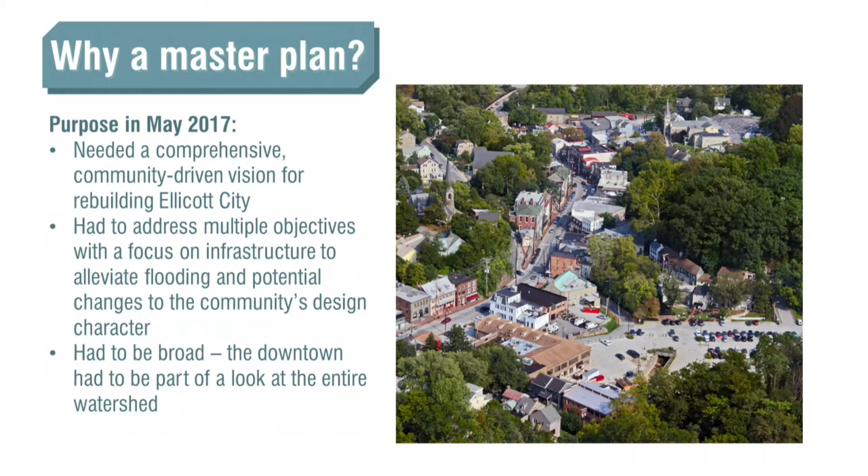Ellicott City is a complex location. It's a historic community, a gem when it comes to architectural character. It's a vital downtown, and we wanted to make sure that the master plan reflected infrastructure changes to alleviate flooding, but we knew those may affect the urban design character of Ellicott City. So that was an important consideration. And it had to be broad because it's not just about downtown Ellicott City. This plan is about the entire watershed, which makes it very challenging.

So why this comprehensive approach? Again, Ellicott City is an important tourism resource. It's a designated sustainable community. It's a Maryland Main Street, and it has historic features qualifying it both as a local county district as well as a National Register district.

So as a result of the 2016 flood, the Department of Planning and Zoning, together with other county departments, did a nationwide search to find a consultant team to help us develop this master plan. We wanted somebody with national experience, we wanted somebody with flood experience, and we wanted somebody who was good at community outreach. So we ended up hiring a facilitator.

Many of you probably participated in those meetings, with somebody who had post-Katrina and post-9/11 experience in New York City. We were lucky because we were able to hire a local firm that had national experience with these types of planning efforts, with specialties in urban design, engineering, historic preservation, development economics, environmental planning, and again, the importance of community outreach. And they've been involved in other flood-impacted communities. So that was a real great thing.

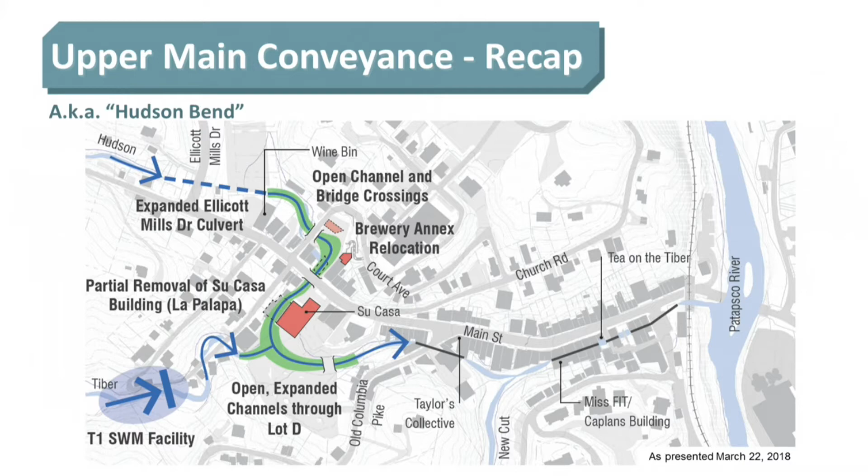At that point, we also identified buildings that needed to be demolished in order to accommodate this open stream channel. It involved relocation of the brewery annex, partial removal of the La Palapa, and with that, the open stream channel would create a great public space. With that, I'm going to turn it over to Mark, who will talk a little bit about the H&H model.

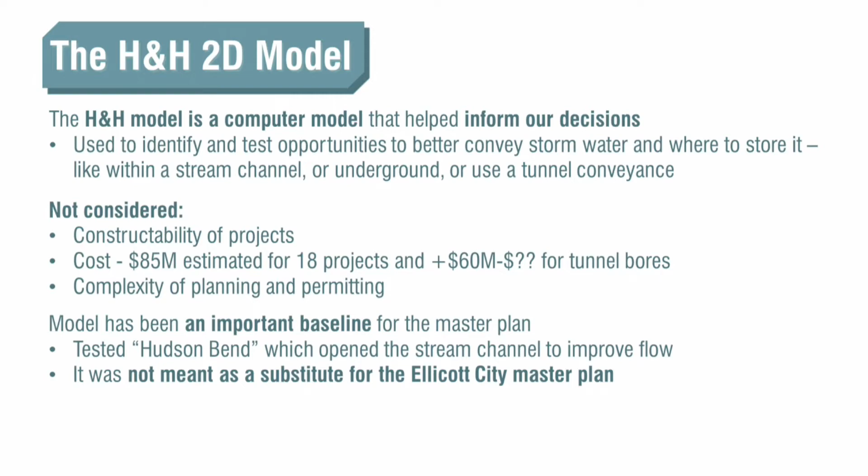One of the projects tested was something Val just mentioned, the Hudson Branch project. There were many other iterations of improvements that the master planning team looked at that we passed through the model. The model and the original projects were never meant to be a substitute for the Ellicott City Master Plan — it was all supposed to run through the Master Planning team and be tested through the model.

So one of the questions is, we had these 18 projects for $85 million, but we had set aside the tunnel projects. We felt at the time, for good reason, given the cost of the projects, they were so limited in nature of where they actually function. If we had done the 18 projects, lots of areas within the Tiber-Hudson watershed would see significant reductions in water levels, but the lower end of Main Street, not so much.

The tunnels were important for that, but we were trying to figure out other ways, because the tunnels were individual discrete projects of $30 to $40 to $50 million each, and they weren't going to be accomplished in a short 5-year period, certainly not in the immediacy of how much could be done in 1 year. But we explored two tunnels, a south tunnel and a north tunnel, and I'll talk about the south tunnel first.

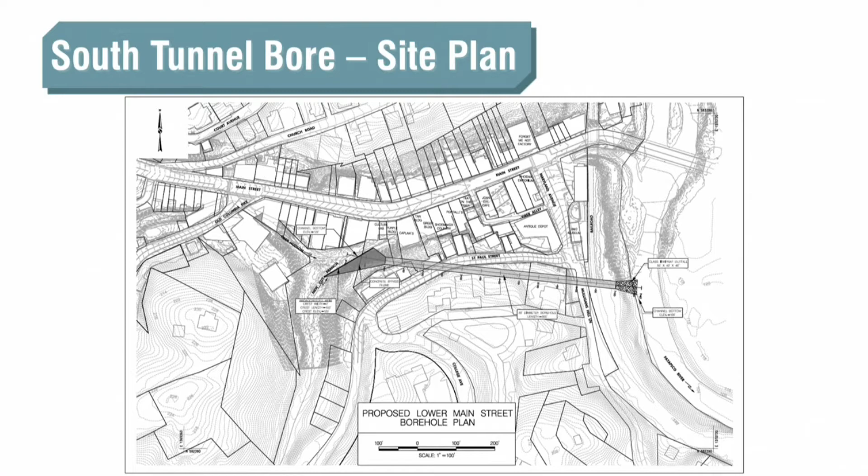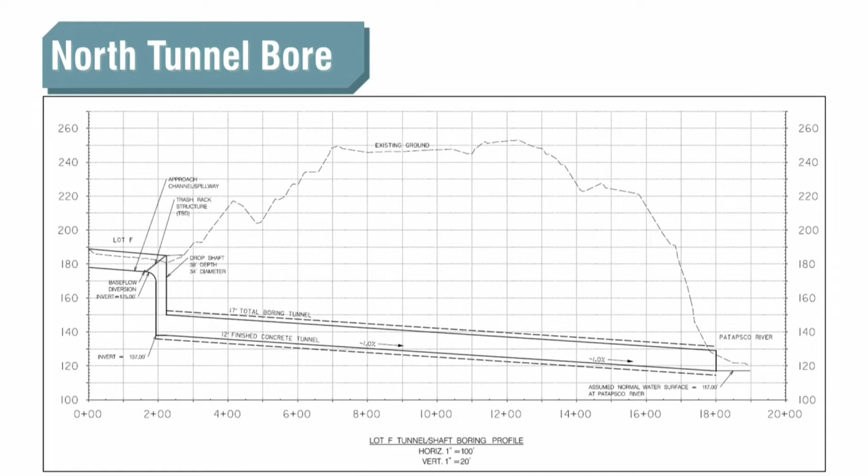This elevation, we never got as far as putting tailwater on it. We just assumed a low tailwater that's not a storm. And then this is the profile of the ground. It doesn't have landmarks on it, but it actually goes under Court Avenue—no, Church—maybe parts of Emory, and then comes out somewhere underneath the railroad tracks again and into the Patapsco River.

So this one turned out to be at about $30-some thousand. This turned out to be about $30 to $50 million to construct, and we felt that it would only go north from there.

This elevation from about here to here is almost 100 feet, so it's very deep in the ground. Of course, Church Street is a hill, and the elevations really shoot up, but we're very low below the ground.

Just from the fact that we'd be going under a lot of historic structures and residential structures, there would be a lot of vibration. There are a lot of constructability issues in terms of vibration, safety, things like that, and cost for one project, which was at least half to maybe two-thirds of all the other projects.

We said, well, let's set that aside. None of the tunnel projects were ever forgotten, except I truly believe we will not go for a south tunnel. I don't think that that's feasible. But anyway, we just set it aside.

Certainly with the mandate to try to do as much as you can in the 1-year time frame, and how much more in the 5-year time frame, this project was not considered to be something that could be done in the 5-year period. I don't know exactly how long it would take to go through planning, design, permitting, and construction, but it's not in the 5-year period.

Okay, so the tunnels themselves aren't the silver bullet, and that's the reason why they were set off to the side. The next slide I want to show you is from Washington, D.C. This is D.C. Water's project called the Clean Rivers Project. Regardless of the reason why they're building it, they're building 23-foot diameter tunnels in the city.

You can see, the reason why I think these pictures are so great is this is for the 23-foot tunnel. Our south tunnel is 23 feet, our north tunnel is 17, so it's basically the same scale.

Now, this is granted, 100 feet in the ground, and I'm really estimating that. I'm figuring that each one of these is about 10 feet, and the scaffolding is 1 story. So this is about 100 feet in the ground.

We would be—our tunnel at the deepest would be 100 feet, but we would probably start at 39 feet below the ground, probably a little bit more, probably 50 feet. And it's a huge concrete structure that needs to be built just to lower in the bore machinery.

And you can't really see it here, but this is a crane, the type of crane that's used to lower this kind of equipment down into the hole. And so from a constructability, feasibility standpoint, we need to be able to find all the room to put that equipment. And it's not that it can't be done, okay? But it just doesn't fit neatly into a very tight 5-year period where we get things done.

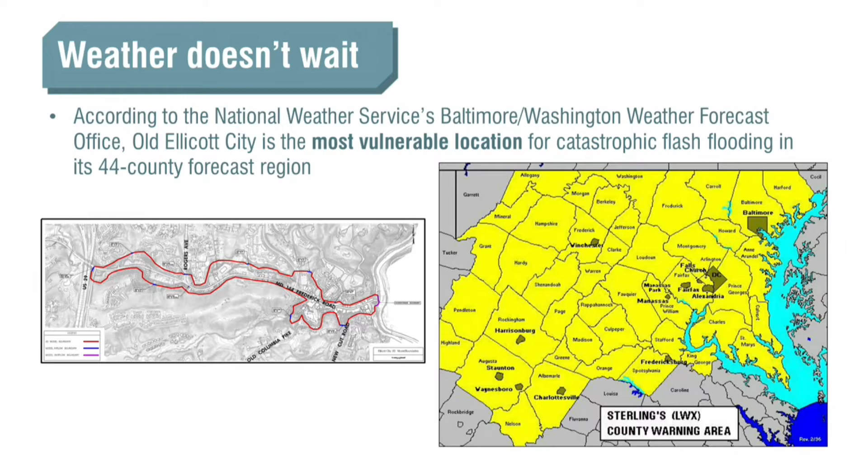And we're not alone. 2018 has not been a great year in terms of flooding. Numerous communities, the Midwest, the East Coast, have all been confronting this. And flash floods in an area like Ellicott City with shallow rock and steep grades create additional problems. You know, I was in Colorado when the flood hit the Big Thompson, and people were swept away in tents and sleeping bags. It happened in 1976, and again in September of 2013, when they got a similar deluge compared to the one that we got in Ellicott City just this past spring.

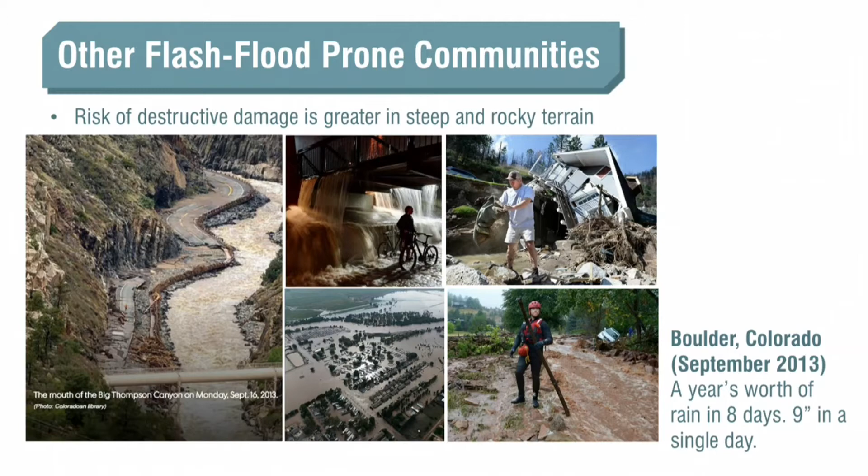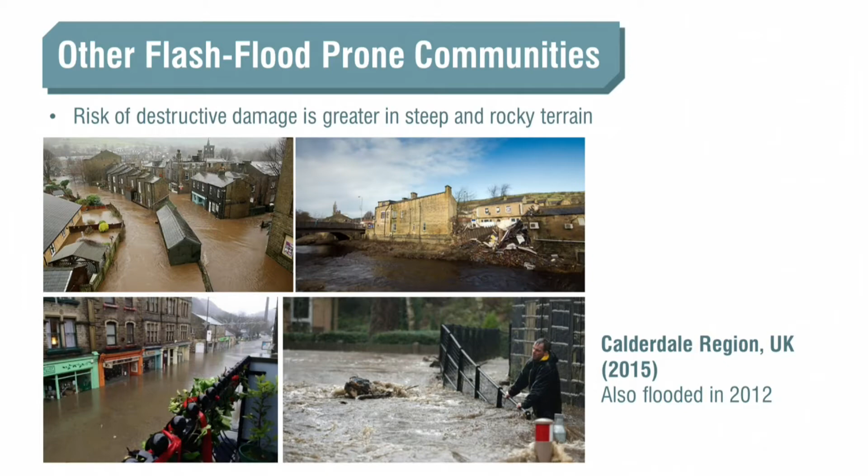Vermont has also experienced these kinds of issues. Our project team has been involved with some of the post-flood planning in the Northeast. And we've even looked to other countries, and you'll see some examples that our consultants will talk about in Calderdale in the UK.

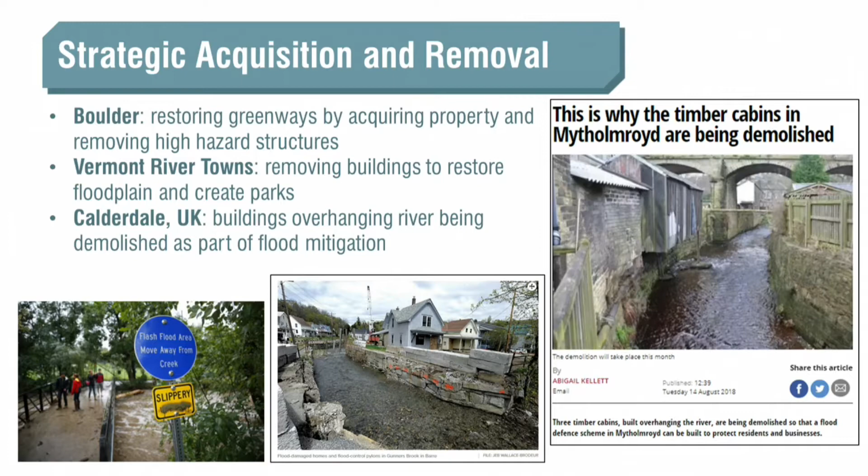The common element here is they're doing something about it. Boulder's restoring greenways, they're acquiring property, they're removing high-hazard structures. Vermont river towns are removing buildings to restore floodplain and to create parks. And in Calderdale, they're removing buildings that overhang the river. They're being demolished as part of flood mitigation.

So time is of the essence. Our goal here is that the 5-year plan identify and begin implementing projects before the next thunderstorm or hurricane season in a way that would reduce flood depths and water velocities to a level that can be addressed by flood-proofing the buildings in lower downtown. The result of that goal was the near-term, or 5-year, plan. And it's the most effective way to approach these issues because it addresses protecting lives. It's urgent.

It addresses urgency because most of the projects can be addressed in a shorter period of time. Their feasibility and constructability has been looked at as part of engineering analyses, and we found that these projects are the most cost-effective from a perspective of, for every dollar spent, the benefit gain. And again, this allows projects to move forward within the first year.

The master plan interfaces with this near-term or 5-year plan. Typically in a master plan, you identify implementation strategies that are identified as near, mid, and long-term. Following the 2018 flood, the focus was on what can we do in the near term. So that became the focus of the approach that Mark had talked about here. So the 5-year plan is the near-term plan.

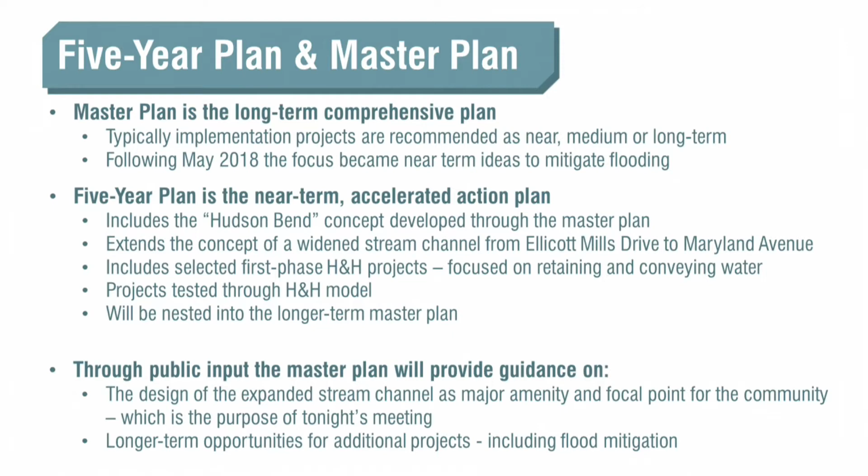And through public input like this, we hope to get guidance this evening on the design of the expanded stream channel that involves taking buildings out. We hope that it does in fact become a major amenity and focal point, and you'll see why we think that this is entirely possible. And as part of that process, the longer term and midterm projects, we're going to be looking at what other types of projects should we be evaluating for the Ellicott City watershed.

So the council voted on October 1st of this year to fund phase 1 of the 5-year plan. The county's recently submitted a permit application to widen the stream channel in lower downtown to the MDE and the Army Corps of Engineers. That does involve removing buildings. The application triggers what's called a Section 106 analysis, which looks at the historic structures and properties that are impacted, and the county's hired consultants to help us with that process.

And in addition, as we look to remove structures within the Ellicott City watershed, there's been a Historic Structures Review Committee established that will help advise the county on preserving key historic elements and buildings that somehow can be reused later on.

Council Bill 56/2018, which establishes a moratorium for development in the Ellicott City watershed, basically requires the Department of Planning and Zoning and the Department of Public Works to study flood mitigation both for the Tiber-Hudson watershed as well as the Plumtree watershed in Valley Mede. We've begun that process. We had a meeting with the Department of Planning and Zoning to look at a process that we'd be going through to look at how can the upper reaches of the watershed be addressed. Right now the focus has been primarily on Ellicott City. We are also going to be looking at the upper reaches of that watershed.

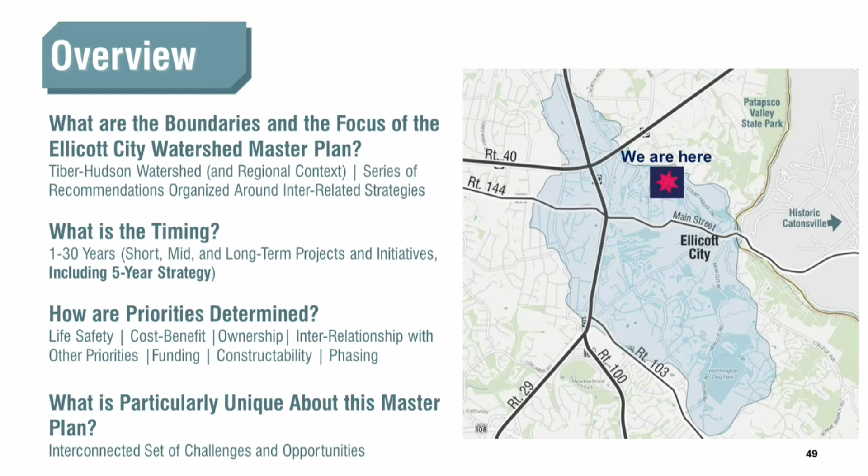And one of the things that's really unique about this master plan is so many things are interconnected. So you can't touch one thing without impacting so many others. So it really creates a real challenge here. But that's what also makes Ellicott City so unique, is all of these interrelated components.

So I'm going to hit, since it's been since March since we really hit on a lot of this, a very high-level summary of the master plan recommendations. One of the things we've heard is, all the focus is on Lower Main. What about the other recommendations? I'm not going to get into great detail, but just show you what's included in the master plan. Then our focus discussion will be Lower Main and the riverfront, and then some of these newer concepts that are grounded in the additional modeling and 5-year strategy.

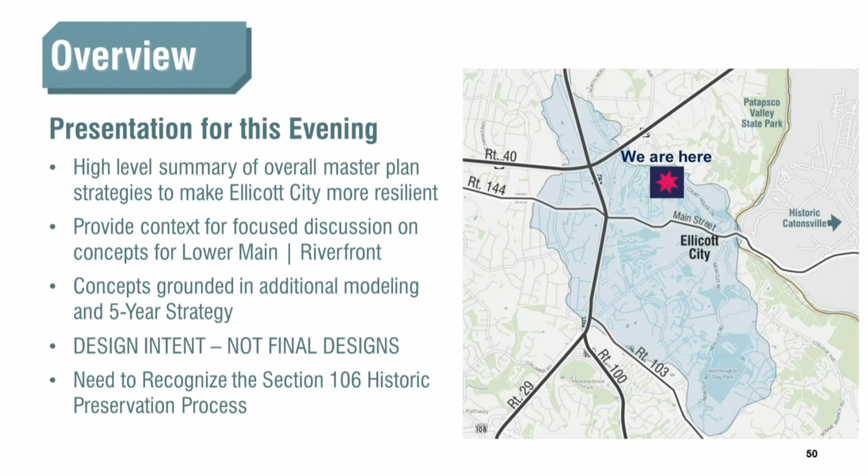I want to emphasize, you've seen some of the images online already. This is showing a design intent. There's still a lot of work. This is not final design. There's a lot of back and forth and additional modeling that has to be done. And then we also have to recognize the Section 106 process that will be underway as well.

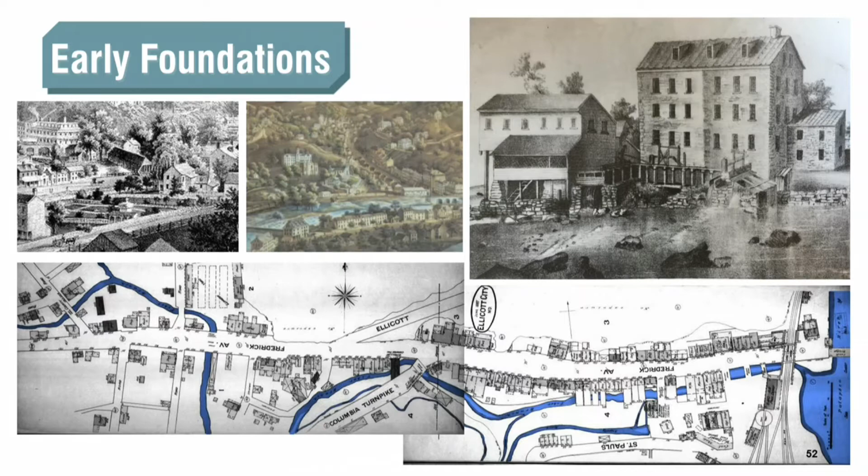So, one of the things that makes this watershed so challenging is the steep topography, the granite, the multiple tributaries leading into the Patapsco, and for obvious reasons, the town was settled right on top of the tributaries for harnessing that energy for mills. The bottom map, the historic maps, is a good illustration, especially in Lower Main, where some of these buildings are built right over the stream and the tributary channel, obviously for harnessing that power in the early days. That then creates all the wonderful intricacies and character of the community. It also creates and compounds a lot of the challenges.

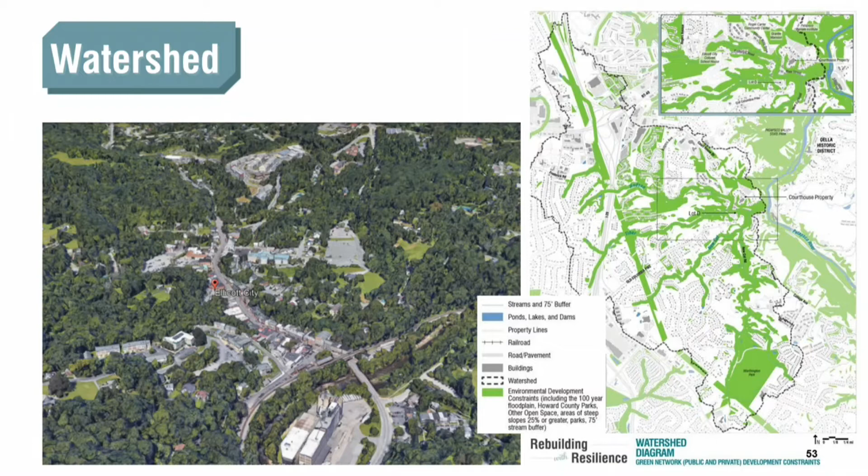As we expand out into the watershed, these tributaries offer wonderful green connections and fingers out into the watershed, and a lot of the recommendations in the master plan are to enhance these green fingers, both for physical connectivity and environmental connectivity.

The implementation of the master plan, it's partnerships, deliberate partnerships between the public and private sector, and all of the recommendations are interrelated. We can't touch one flood strategy without impacting parking, historic preservation, economic development, and so forth. And it's not going to be the county doing all of this. There's going to be individuals, organizations, businesses, nonprofits, and different agencies within the county.

Val already hit the vision statement, so I'm not going to go over that, and we also hit the core goals of the master plan, including the life safety that was added since the last flood. These core goals inform or apply to the 5 strategies that we've developed. We presented these back in March. I'm going to just, at a very high level, hit each of these. Managing and protecting the water.

Our work and our study has addressed that reducing flood impacts is through a combination of conveyance and retention, but while balancing life safety, water quality, cost benefits, constructability, and policies for growth and revitalization, some of the things that Mark had already hit on.

The 5 broad recommendations in this category, each of which includes numerous recommendations, are the flood management strategies, including the 5-year plan, but that also includes longer term, looking at what other recommendations of the H&H study are applicable and worth exploring beyond the 5 years and in the long term.

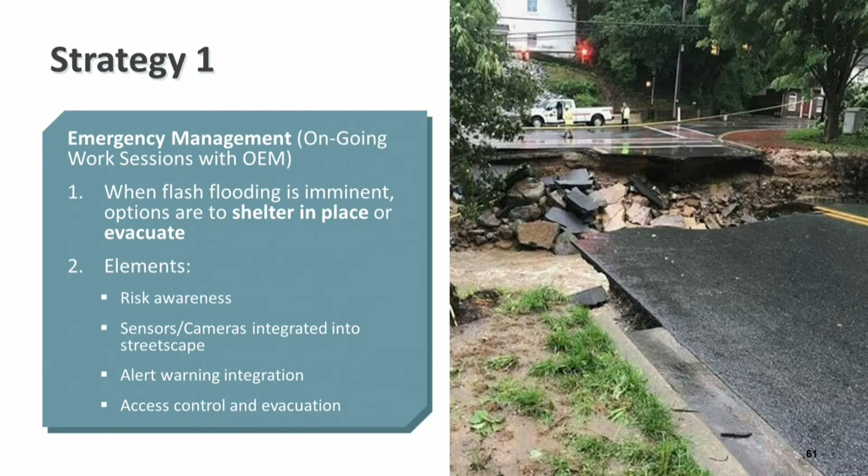One of the things we've met with the Office of Emergency Management about is that the county will be sitting down with them in more detail, because their work needs to be a strong component of this master plan. Looking at elements of risk awareness, we'll look at how sensors and cameras can be incorporated into streetscape improvements downtown, how alert warning systems can be integrated, and then access control and evacuation routes, and how that messaging gets incorporated into the public realm.

The second overall strategy is planning for economic success. We need this to be a successful community. Within that we had a number of recommendations: historic preservation program enhancements, including strategies for dealing with neglected and vacant properties, and market attraction.

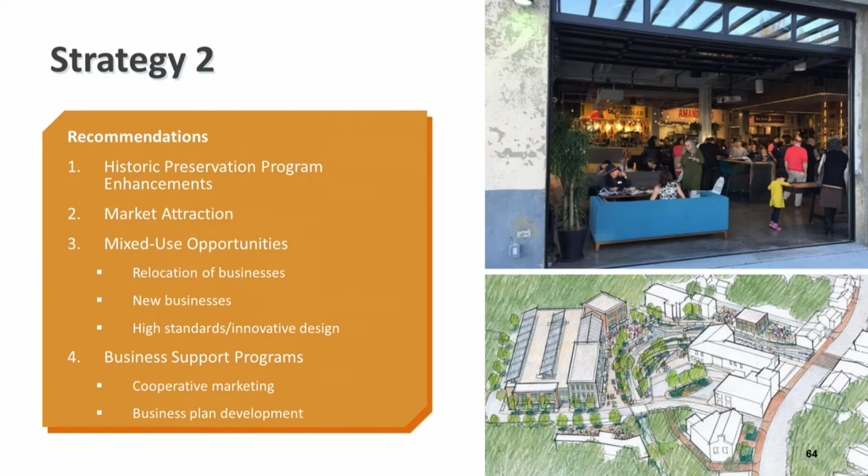A market study was done looking at businesses most likely to be attracted to Ellicott City, and what opportunities exist for them, whether in new construction or relocating existing businesses displaced by floods. Then there are business support strategies for cooperative marketing and business development plans, not only for new businesses but also existing ones. A third overarching strategy was enhancing the experience.

These are all the recommendations dealing with transportation, parking, streetscape, open space, public art, lighting, programming, and events - recommendations about the experience when someone gets out of their car and comes to Ellicott City, how they experience the community. Again, each of these is nested with a number of very specific recommendations.

With this recommendation we also have a lot of parking recommendations. If you recall from March, the main locations where we could offset parking loss from these flood improvements are decks in Lot A, Lot D, and possibly Lot F. These are the logical locations for a deck structure, coupled with temporary shuttle systems during construction.

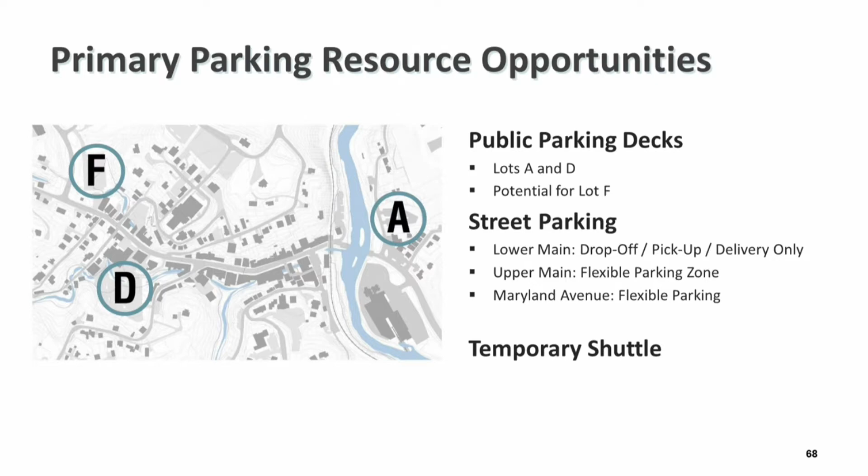The fourth category is protecting and enhancing the environment - not only the historic district but the areas surrounding it, looking at new development. How do we enhance the development criteria so that buildings are designed and development is designed to fit the land, not the land designed to fit the structures?

Also looking at the community brand and character overlay districts as one approaches the historic district, what guidelines are needed for implementation, and how do we enhance that character with character-based codes, which would be included in the zoning ordinance.

Also looking at the community brand established for Old Ellicott City, and how we extend that into a marketing campaign - whether through construction signs to communicate that construction is happening to improve the community, banners, or marketing signs.

How do we embrace some of the challenges, like our steep slopes? If we ask people to park at Courthouse Hill, how do we poke a little fun at ourselves that it is a hike up to Courthouse Hill, but it is doable.

The last strategy, a very important one, is organizing for success - how do we implement all of this? You may recall we talked about the importance of having an organizational entity whose sole focus is Ellicott City. Ellicott City is a small component of overall Howard County - it's a very unique community with unique qualities and characteristics, and there needs to be an entity that thinks only about Ellicott City.

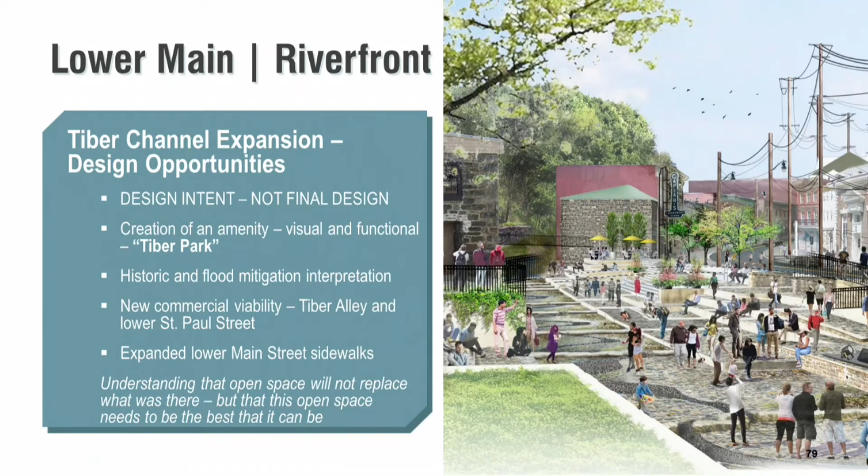We also have some design realities that we're facing with this. This cannot be a naturalized stream channel through here. It's going to be primarily hard surface. We may have some limitations on using some of the existing bedrock for the surface of the channel. We're running into that - Matt is working on the Ellicott Mills area, and we're running into some of those issues up there. There is, on a daily basis, a limited base flow. It's not going to be a big, wide, vibrant river. It's going to be 3 to 6 feet maybe on a daily basis, until obviously when there's high water. And then maintaining the hydraulic capacity while functioning as an amenity space is something we need to consider. So the function has to really be considered, not only the form, and then some of the culvert openings that we're dealing with.

Some of the other realities is balancing historic interpretation with hydraulic function. We have the constriction at Maryland Avenue. The existing constriction is a real constraint, so we have to deal with that, and the double culverts that are being planned will help deal with that. There's always the potential for debris. The modeling results that we have seen are only as good as we can keep those channels functioning the way they're supposed to. If they're clogged with debris, if the culvert openings are clogged with debris, they're not going to function the way the model depicts.

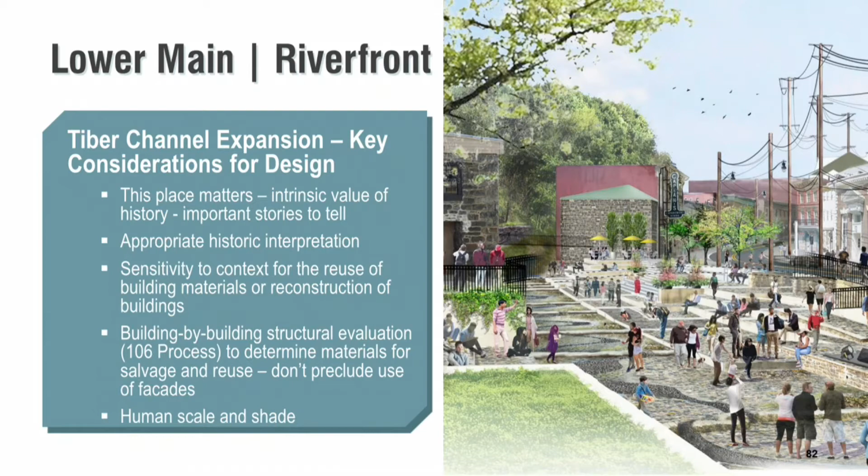We want to make sure we keep options open, and we want to look at that human scale, and also providing shade for the usability of this space.

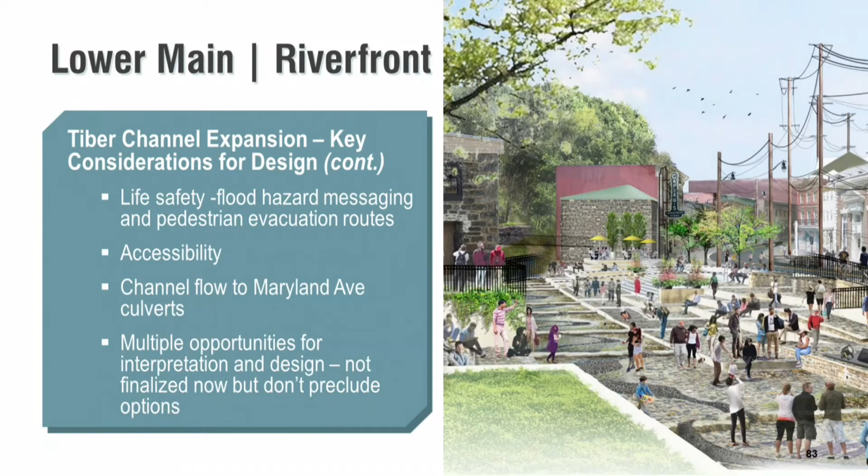Other considerations: life safety and flood hazard messaging, how that's incorporated for identifying pedestrian evacuation routes and high ground, accessibility, the channel flow to Maryland Avenue, and then creating multiple opportunities for interpretation and design.

So I want to flash through some images before we get into the details of the plan, just to show some of the things. No one of these really captures exactly what would be the situation in Ellicott City, but it's going to be a combination.

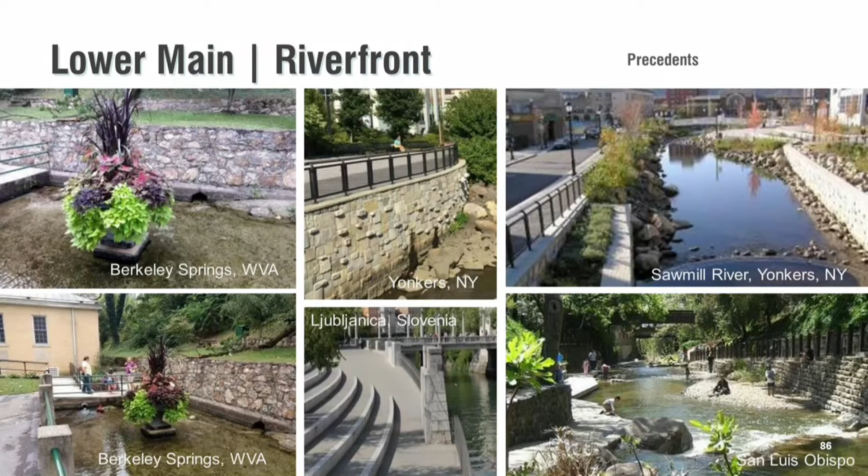More local examples in Yonkers and Berkeley Springs, and Slovenia—not real local, but just different examples of the walls, the materials, incorporation of planters and pots. We'd love to get as much vegetation in here as possible, but we have to realize it's not going to be a green, naturalized channel.

Stone terraces—stone is such an inherent element here. How could we utilize that? And that brings us back to Ellicott City.

There are also interpretive opportunities. There's obviously the signage that could be done, which is very important, but there's many more, whether it's pavement markings or frame outlines of buildings, use of shade structures, and flood awareness.

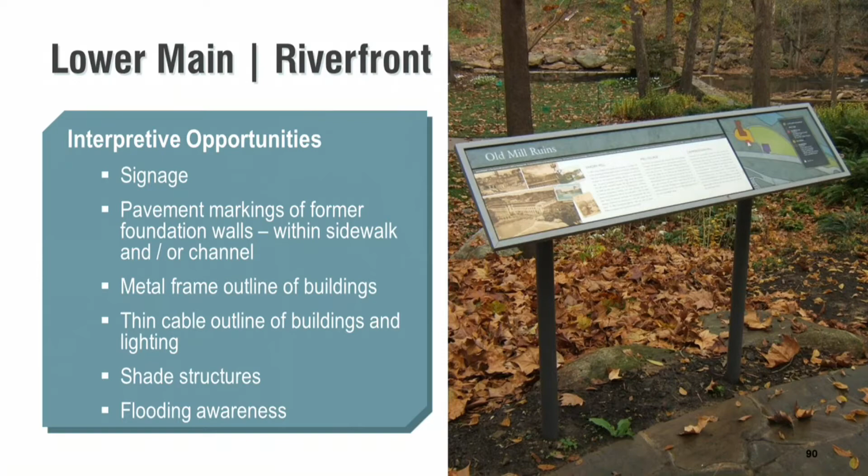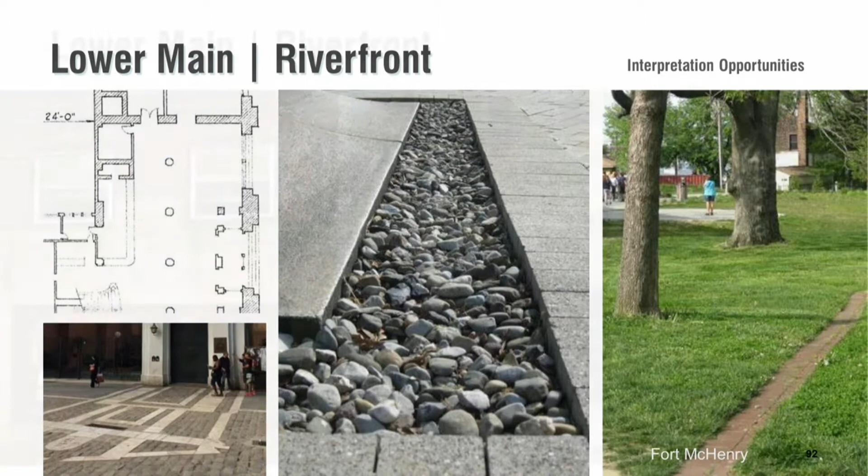Or if existing foundation walls aren't possible to use, there might be new ways to interpret where building lines once were with different paving. Important facades and remnants of facades and buildings to keep, and how could they be represented.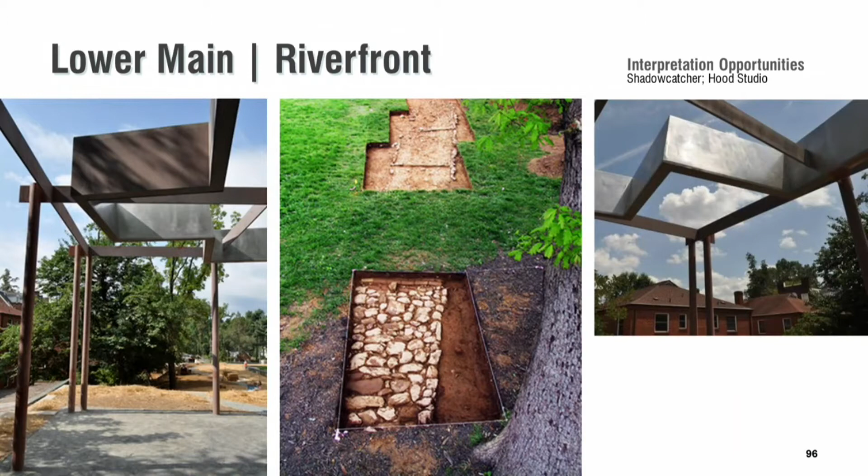Or it might be interpreted in a more artistic and contemporary way with building framing, or possibly even fiber optic lights—maybe a temporary art installation where lights are used to create outlines of buildings that were once there. Again, these all have to be detailed out and studied in detail.

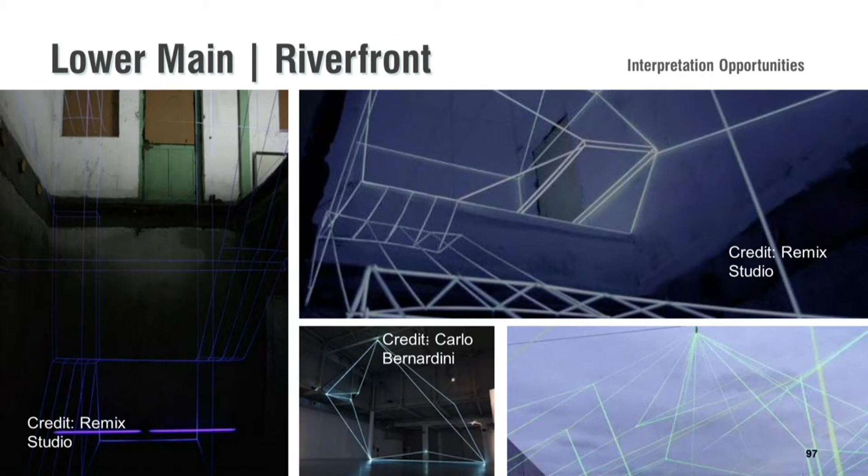Shade is going to be important, so there might be shade structures that replicate some of the former roof lines that were there, or some of the building forms that were present. And then even interpretation of some of the flood levels, that this is a community developed in a floodplain, and how do you create the awareness other than just signage?

Boulder, Colorado had this Connect the Dots art program where throughout the town these blue dots represented high water lines, just to keep that awareness to the public that we are in an active floodplain.

And then it's going to be important to incorporate site elements. We heard a lot of fear that this will look like the LA River, a big concrete channel. That's what we want to avoid.

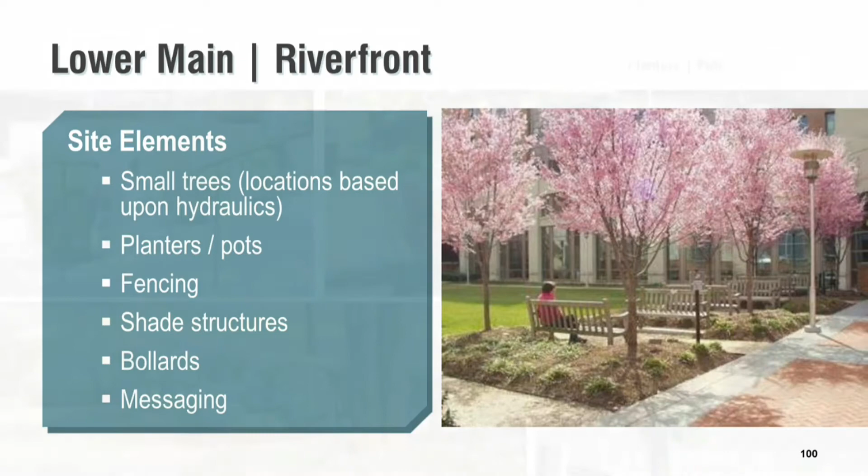So what site elements? We want to try to incorporate trees as much as possible, but recognizing they could be a debris hazard, so we got to be very careful about that. But there may be opportunities for planters and pots and getting color.

The fencing, whether it's the Ellicott City standard fence, or are these opportunities to use more creative fencing, more contemporary, or ways to incorporate and use the fencing for some interpretation and public art.

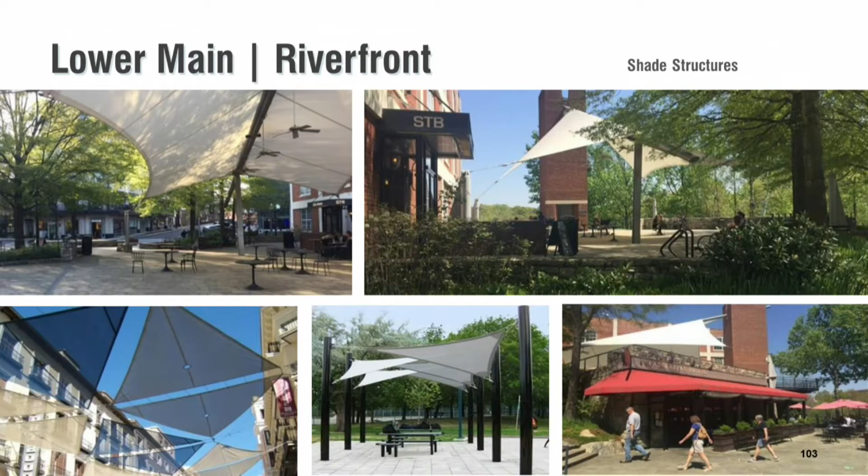Shade structures will be very important, whether they span large sections of the channel or certain areas. Some of the columns supporting these might also be columns that help keep debris from washing into the channel, or cars, or larger elements like that.

And then surfaces, very important. What's the surface? This has to be a hard surface channel, concrete, but can we embed rock and boulder and stone into that concrete base to get patterns and something that's more visually appealing? There's a lot of different ways to do that, and different stone patterns to achieve.

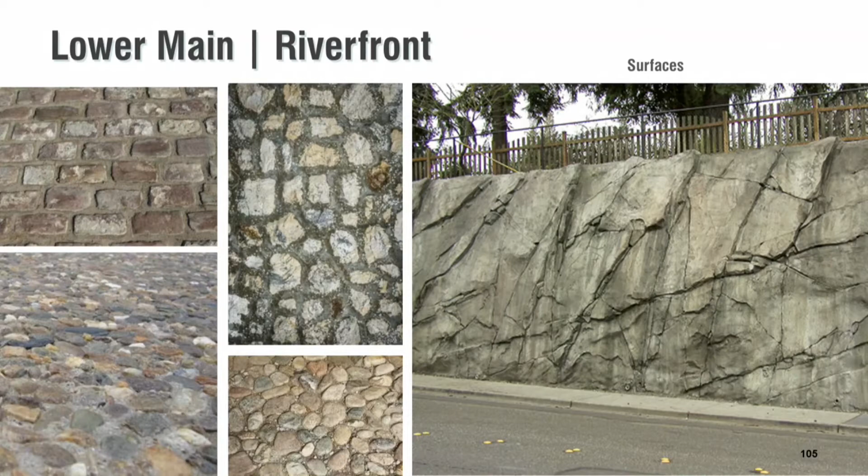There may be opportunities to preserve some of the bedrock as the channels widen, or to recreate that with concrete.

And then messaging, whether it's interpretive signage, messages for high water marks, again, to keep that visual awareness of where the flood levels would be. And then the messaging and preparedness - we talked a little bit about this earlier. How do we incorporate this into the overall design?

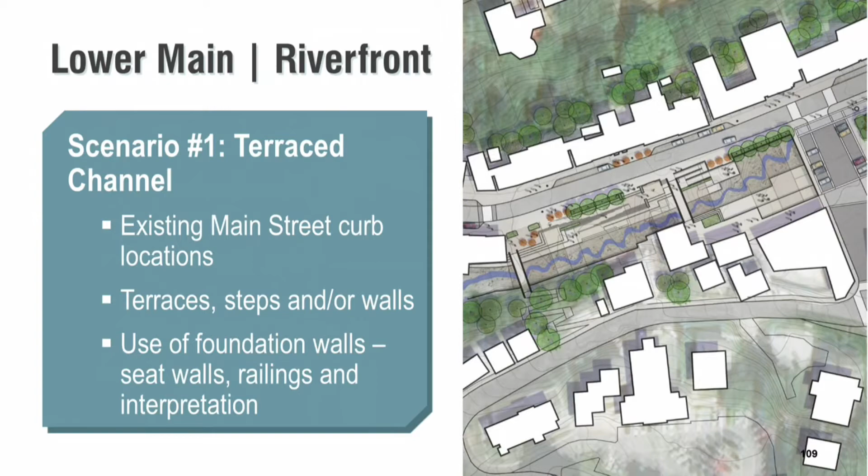So as we get into the channel design in a little more detail, we want to look at the first scenario, looking at a terraced channel. Okay, so this channel here, this is Main Street.

This is where Caplan's was. This is where Tiber Alley is right now. We're proposing that that might be a location for a pedestrian bridge. This Tiber Alley would still be intact right in here, Maryland Avenue, and then this is St. Paul Street here.

So an opportunity we see is to create, maybe there's a broader plaza area at Main Street, street level where Caplan's was, more of a gathering area at the Main Street level, incorporating some of the elements. These planters represent the window bays of Kaplan coming in.

We want to have this accessible. This is a 5% ramp and stair system coming down here. With 5%, we can minimize the railings that we need to have here. These are broader terraces that come down.

This is the location of Tea on the Tiber, possibly integrating some of those walls or elements of the wall, that becomes a gathering space in the area. And then this might be another ramp system that comes down.

And where we're showing the paving, the rock embedded into the paving, the concrete that I showed some examples, they may be used subtle color differences that represent some of the building locations that were once there, and then also trying to incorporate green, some smaller trees along Main Street, some planter beds within the channel.

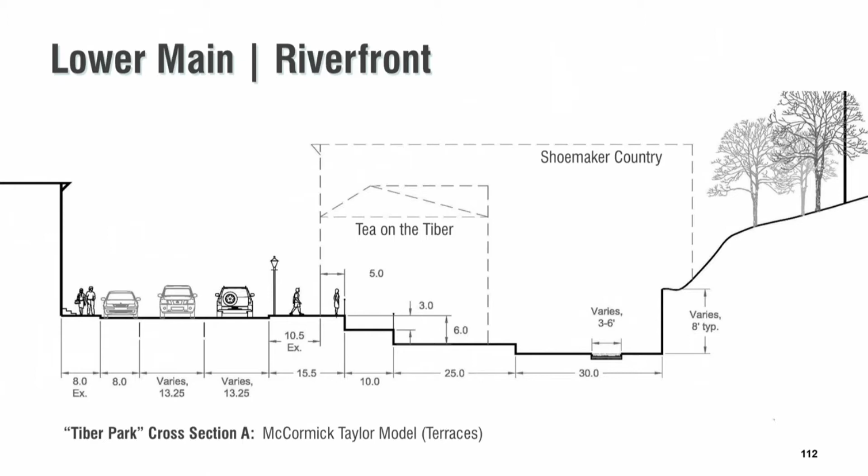And again, there's a lot of back and forth design in the modeling. This is the cross-section that was included in the McCormick-Taylor model. In their modeling, it was a series of about 3-foot-high terraces that step down to the channel. This is in the vicinity of Tea on the Tiber and Shoemaker Country. And then we looked at, these are some crude model views.

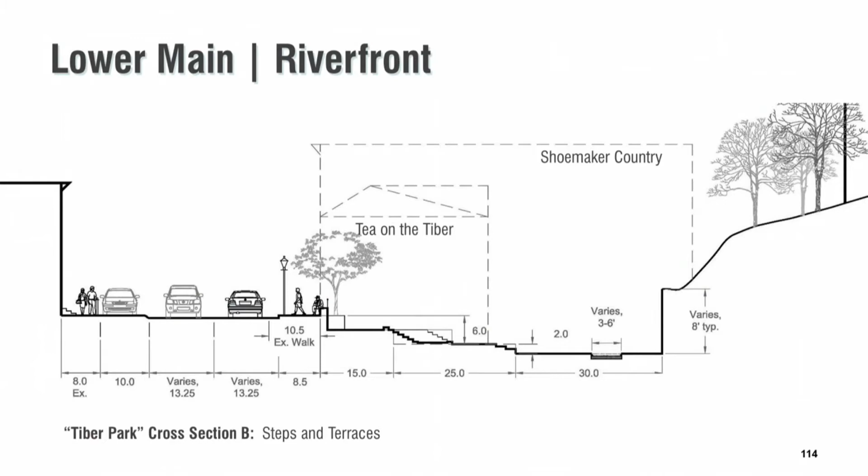There's different ways we could look at this, whether it's the 3-foot terraces or a series of smaller terraces that allow you to get down into the space easier. It may be a series of steps, or if the hydraulics indicate we need a wider channel, it may be a broader channel at the bottom, like we saw in examples from Korea and China, with most of the wall and grade change happening at Main Street and a wider sidewalk area there. In cross section, ideally we'd love to have more terraces and steps that allow people to get down to the channel at different areas, and that's what's represented in this plan.

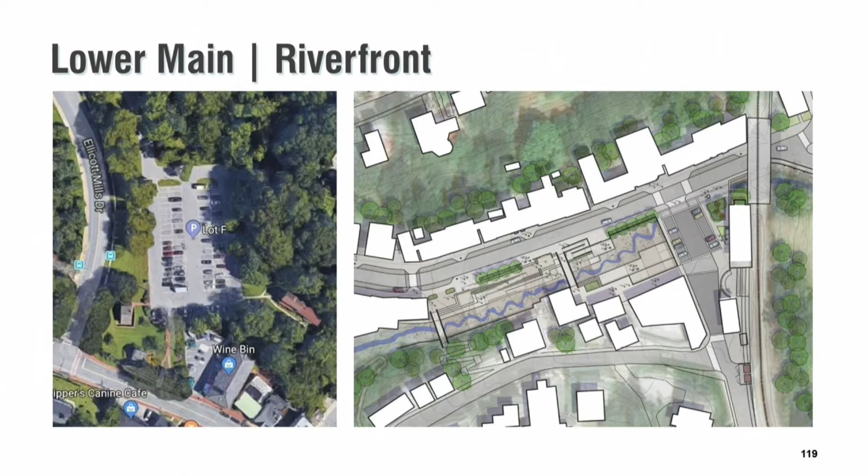During our MPAT advisory meeting, the question was asked, what's the size of this? What's the scale? It is a large open space, so we put that in comparison. If you were to drop Lot F on top of the Lower Main channel, that's the size of it, just for a scale comparison of that area.

An important feature too, in terms of life safety, is we're showing a bridge in this location. The most useful bridge benefit would be in the Caplan's area, but that comes into a high hillside. We're showing potential ramping and steps up to St. Paul Street. The bridge here may have to be at a high enough elevation to allow floodwaters underneath, so it may require some ramping and stairs in this area, or even an elevator.

If there's a structure there, that might support other structures that could represent the facade of the building that was there. This is showing, dropped in very subtly, like those outlines of buildings we saw. There might be an opportunity for the Caplan's sign where it once stood, the Tea on the Tiber, and this is the Bean Hollow, the Art Deco facade of the lower level. Again, that's just showing how some of those elements could be incorporated, not determining which ones they are at this point.

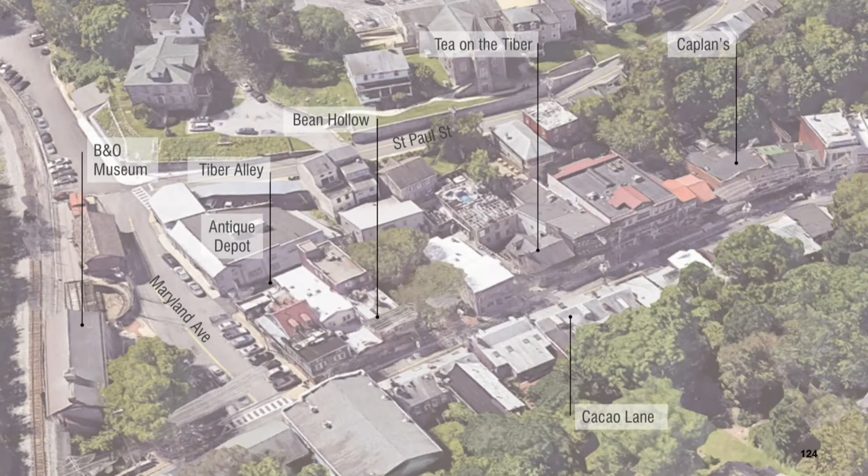This is another view looking in the other direction towards St. Paul Street. Again, getting a sense of the ramp up to St. Paul Street from the Caplan's area, and then some of the broad channel.

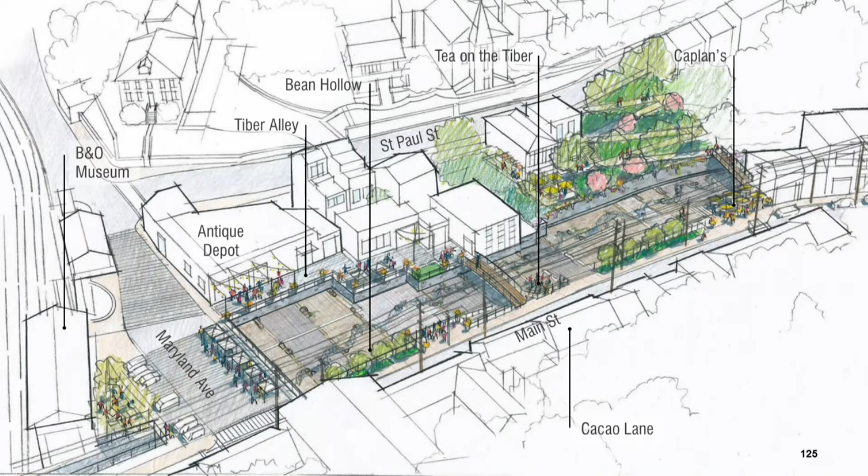As you can see, in the lower section of this we're minimizing the number of terraces, steps and obstructions. This is where water flow would need to get under the new culverts and then also into the existing culvert. But as the detailed design and detailed modeling occur, we'll be able to look at and experiment with how much change we can actually incorporate there. We can't determine that right now.

This is just a crude model view looking east toward the B&O, the Caplan's, showing how the Caplan's sign could be relocated here as part of the facade outline, and then some of the other facade outlines along the streetscape as well.

This is the view that I think many of you have seen. Again, this is a design intent, not a final design, but getting an idea of the surfaces and textures, trying to minimize railings within this zone as much as we can, minimizing obstruction. So the hydraulic modeling will really determine exactly what we can do in terms of steps, terraces and walls.

That's just fading in. We'd like to have a bridge at the location where the Tiber Alley currently crosses over. And we need to recognize it's not always going to be filled with a concert, a festival, and a lot of people. That's why it's important that this look good when it's not filled, that the textures, surfaces and design have a visual and aesthetic appeal as well as a functional one.

And then this is just showing, again, how some of those structures might be replicated with the frame outlines, or there might be awnings or shade structures incorporated as well to mimic some former roof lines.

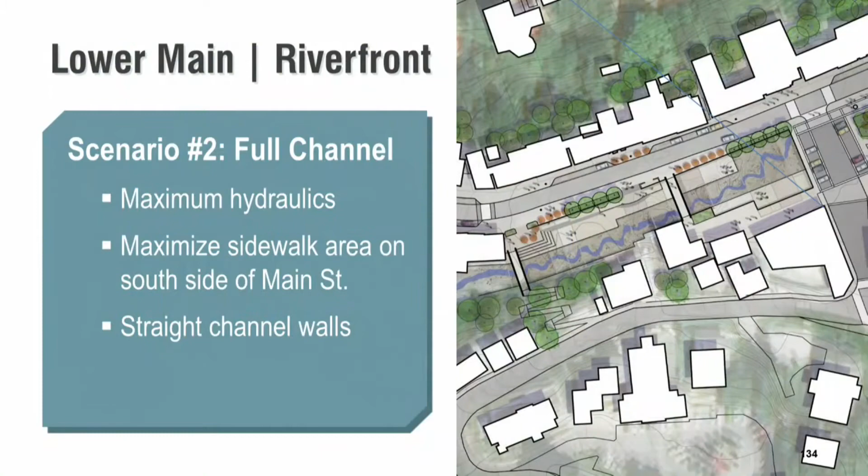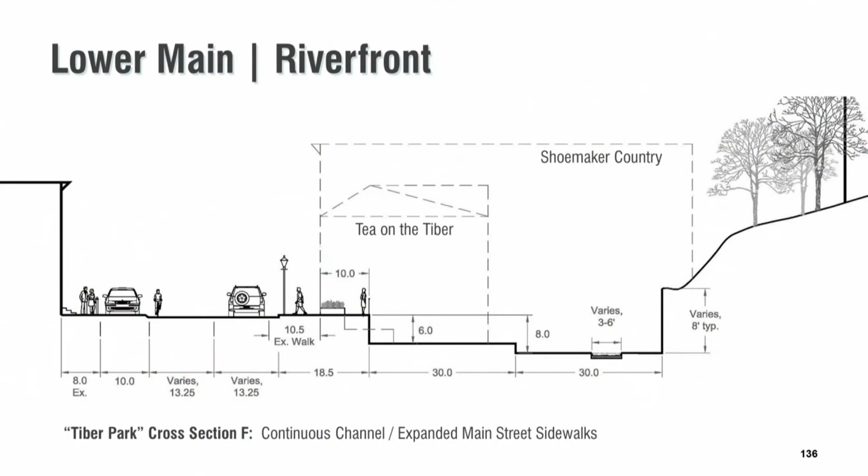The second scenario we're showing is really looking at, well, what if, for the purpose of hydraulics, that has to be a much wider channel and we can't have all the terracing. So we would still like to try to get a gathering area near the Caplan's, but a ramp at 5% that follows the edge of Main Street, maybe some stairs here, but really minimizing a lot of the terracing and the steps to really maximize that channel. Again, this would be determined in the detailed design.

The same views looking at that approach. So this would show a much wider area at the Main Street level, so it would have more gathering and pedestrian area at Main Street level, then probably a 6-foot wall down into this space. Still opportunities to access it, but not as many as we were showing in the earlier sketch. And again, the texture, the scale, the design of this becomes very important.

Also looking at the streetscape, there's an opportunity for sidewalk expansion on the north side of Main Street. As we said, we would look at that as really primarily parking and drop-off and delivery. The modeling shows in the shear stress that brick paving is not good, so we need to do concrete paving. We'd want to integrate flood warning systems into the streetscape, wayfinding, and placemaking.

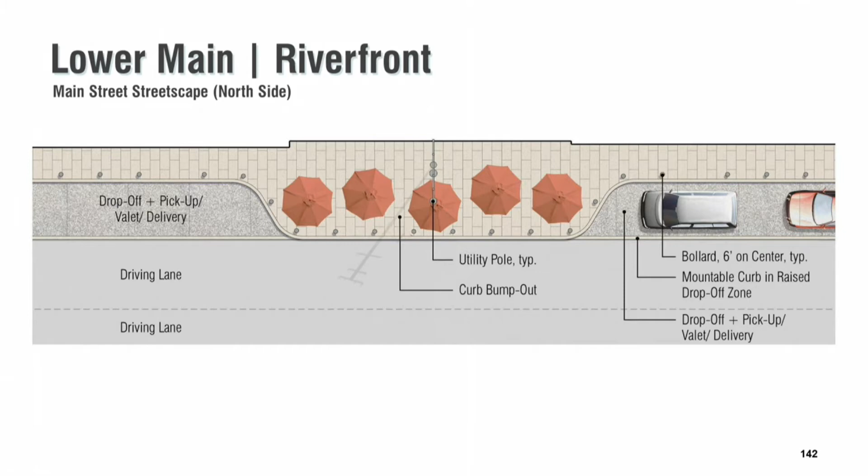And so on the north side, this is an example where we could have the drop-off pickup zone, some expanded sidewalk area that could support some of the restaurants and cafes over there. We're looking at that drop-off pickup zone being raised to sidewalk level with a mountable curb, so it could be expanded for more sidewalk area during festivals and events.

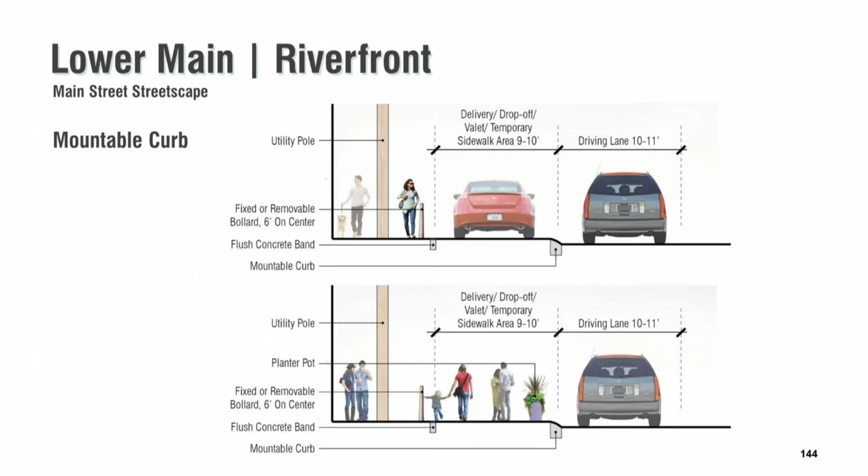We talked about this last year with the movable bollard, that most of the time it functions as a drop-off area, but then for that bollard we could use a potted plant or something else to move it out, and that becomes extended sidewalk area during events. And then in those areas where you have the permanent bump outs, we have wider sidewalk and could accommodate outdoor dining that you see here.

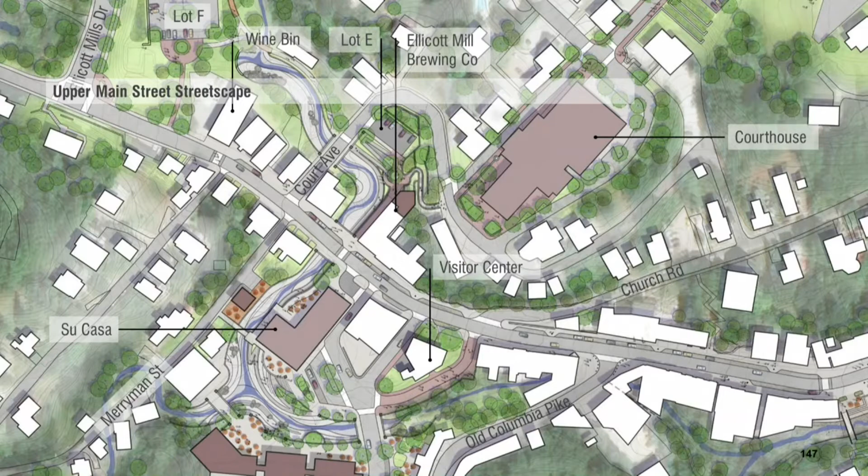Further up on Main Street, we could have the ability to have possibly some on-street parking as well as delivery and drop-off, and incorporating some of those bump outs around utility poles. This is Lower Main down here and further up here, where we would at least recommend that if in the interim you do allow for parking to occur here, or if parking is not permitted in the interim until some of the other flood mitigation occurs, allow the flexibility that could be added after some of that mitigation is put in.

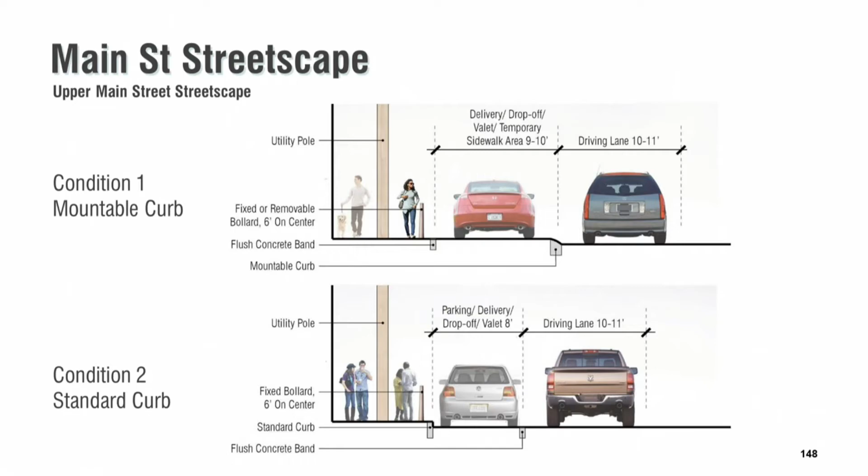And again, showing the condition where we have the width, do the mountable curb and flexible parking zone, and then in other areas it would be just the traditional parking zone. Paving, scored concrete, and here's some examples of where it's done well in other historic districts.

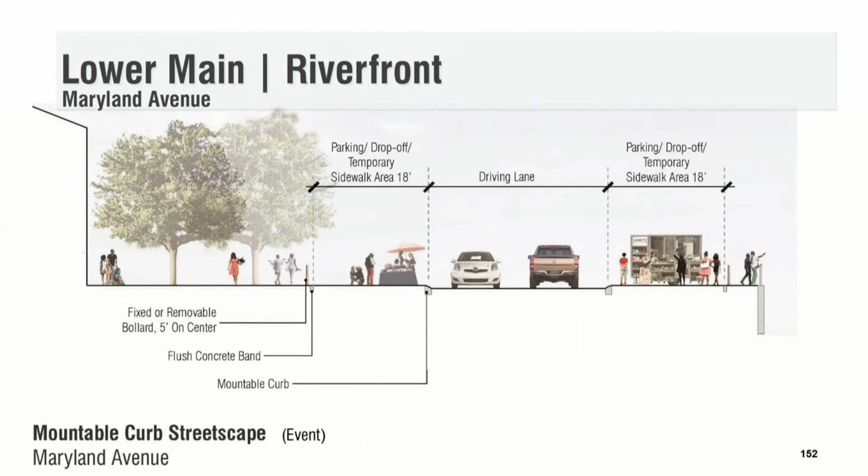And then as we look at Maryland Avenue, we shared some of these concepts earlier in March. We're looking at Maryland Avenue treated as, again, a flexible use space that most of the time functions with parking, but raise that parking level up to the sidewalk so that you could also have those as flexible spaces for food trucks and other events, and expanded sidewalk area. And there's some examples in other communities where that parking or drop-off zone is raised up to sidewalk level, and it becomes a little more flexible for when you have larger events and festivals.

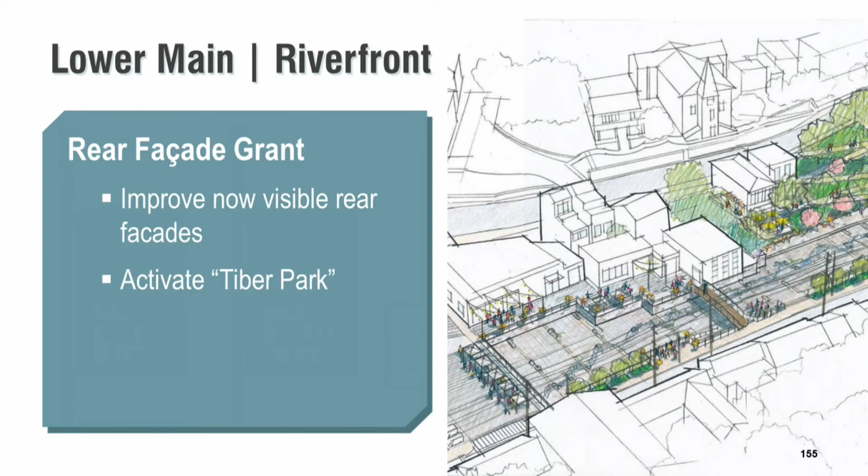An important part of the streetscape will be wayfinding signage, again using the Ellicott City brand to incorporate into the wayfinding signage. Also, another recommendation is looking at, with the exposure of those rear facades on St. Paul Street, potentially a rear facade grant to make those now very visible facades more attractive, more usable, and viable for some commercial uses, especially those businesses on Tiber Alley and the lower end of St. Paul Street, to help activate the widened channel.

I'm now going to move into some of the concepts we talked about earlier in March. The Patapsco Riverfront is really a great opportunity, and we're showing, I'll zoom in.

We talked earlier about parking lot A as an opportunity for structured parking. We will have a lot of demand still in Lower Main, and this is the best opportunity to create that. There's been a lot of conversation. We know plans are in the works for establishing the Trolley Trail number 9 pedestrian bridge across the river. That could be a real asset.

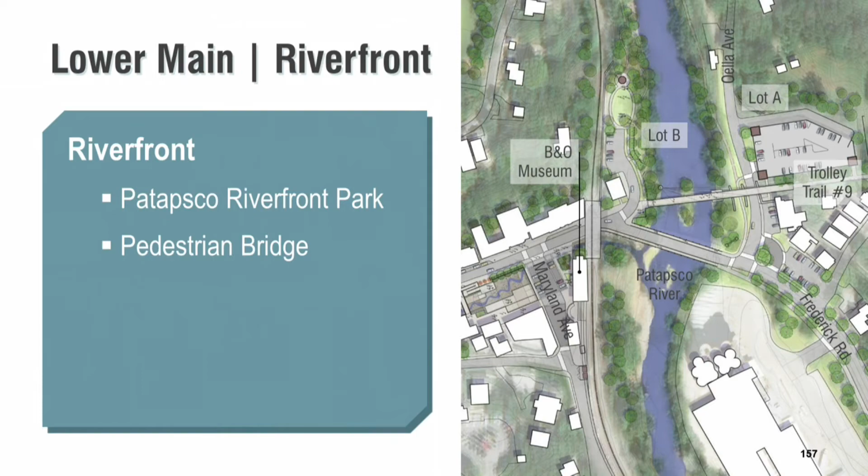And with the creation of an expanded parking resource in Lot A, that might allow long-term a portion of Lot B to be converted into a riverfront park. This is the only area really accessible to the Patapsco River in Ellicott City. Again, we see this as a long-term recommendation once other parking resources are developed.

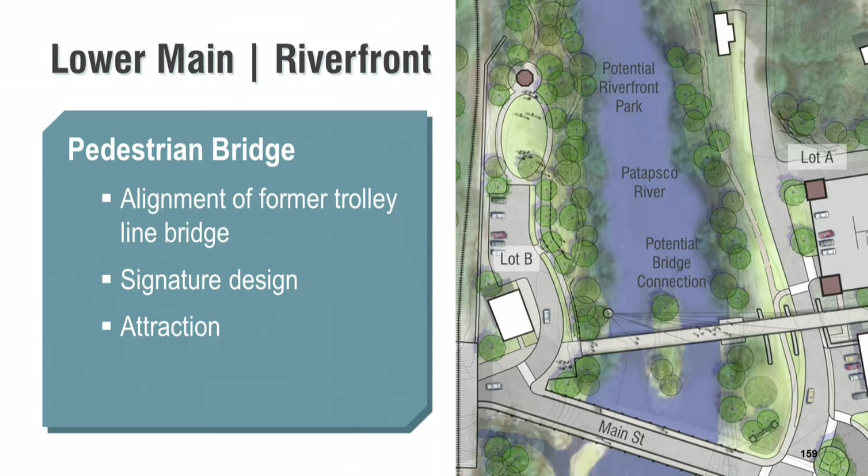We also see the opportunity for this pedestrian bridge across the Patapsco, where the trolley bridge once occurred. It really should be a signature design bridge. In other communities, like Greenville, South Carolina, the bridge is an attraction in and of itself. And especially for people parking in Lot A and coming over to Lower Main, if it's an attractive, enjoyable experience, they could really engage with the river in that environment, and that distance won't be so critical. It could also be a venue for public art, as I said, an attraction in and of itself.

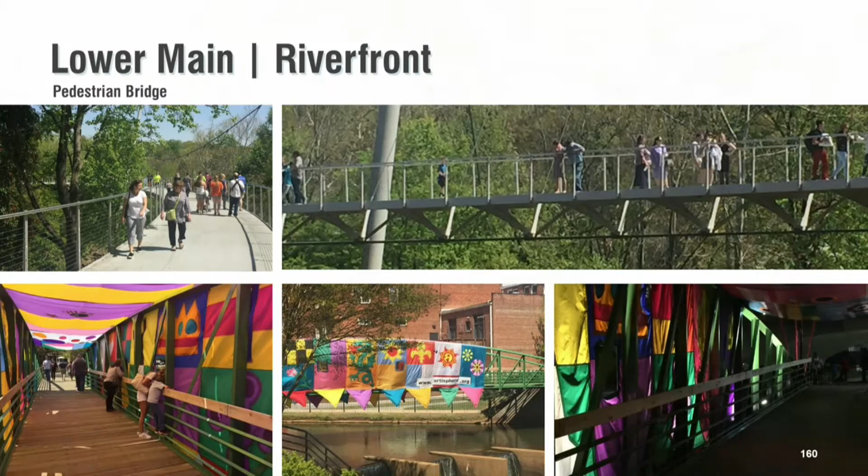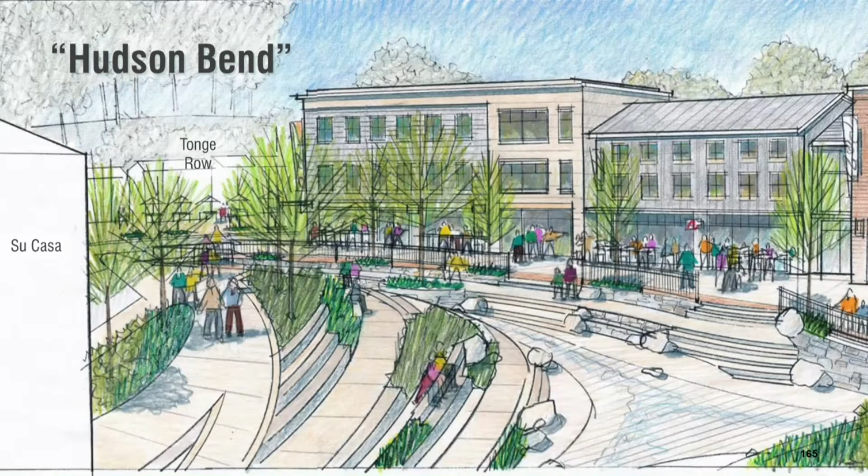This is the existing view. We're kind of up on Merryman Street looking back into Lot D, and then the proposed view of how that could look. It'd be very important that if a parking structure occurs here, it be wrapped with development, so that there's some revenue generated, but more importantly, that there are active uses activating this open space.

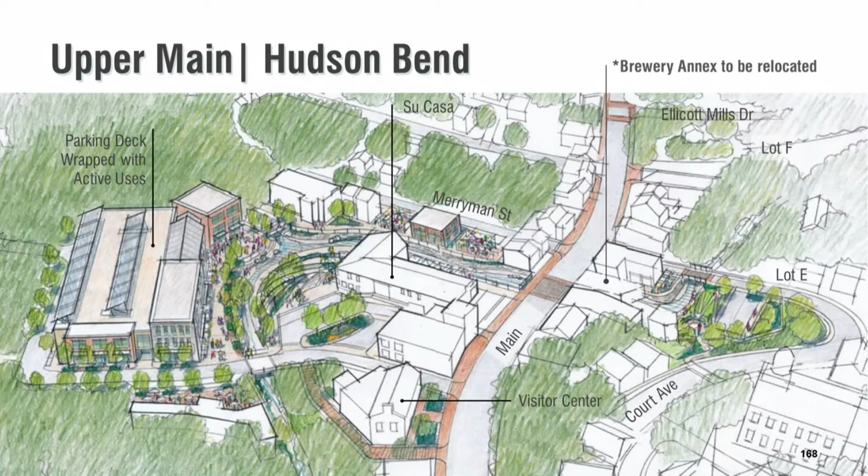This is a view looking at Lot D, again from the air, and then how that Hudson Bend and the integrated development might incorporate in there. Again, it's very important this be an innovative design, really done well with an eye towards developing in an urban district, not a more typically suburban area like the rest of the county.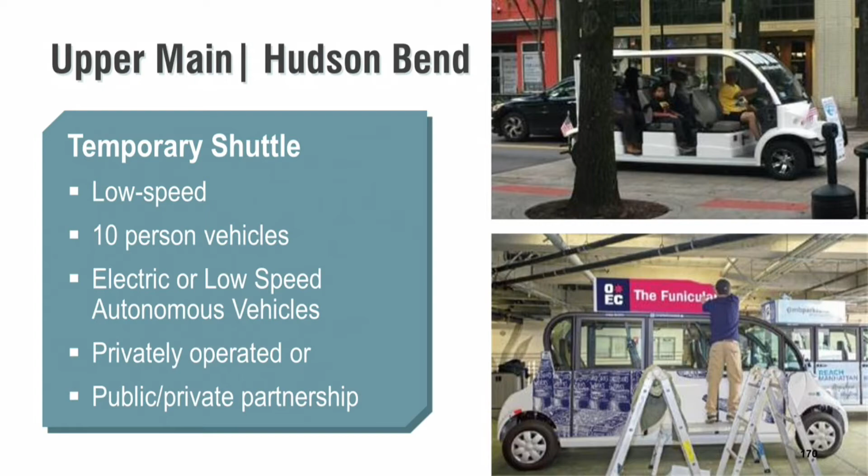And Jim Burnett from our team has done some research. There are low-speed autonomous vehicles that are being used as 10-man shuttles, some in Detroit, and Las Vegas has experimented with these. And so there are opportunities to look towards something like this in Ellicott City.

We've also been working with Rec and Parks. The Heritage Program Center will be moving to the Barnard Fort House, and this will really manage EC as a heritage district. So we're looking at how this could be incorporated into the overall planning.

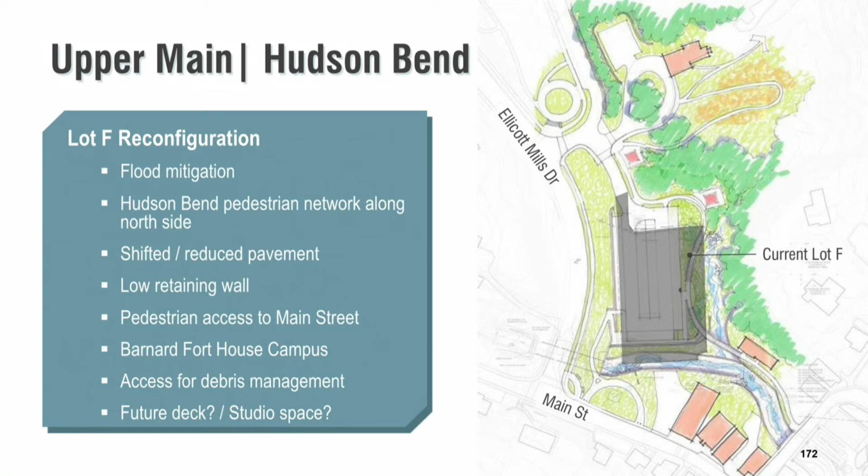But we're also relocating the log cabin. We identified a couple locations where that might locate. We think this location might be the most suitable. It puts it along the pathway network and also in the vicinity and part of this campus for the Barnard Fort House. We also see opportunities at long term.

This is showing parking lot F as a surface lot with the widened channel through just underneath Ellicott Mills. We see a long-term potential that might be a 3-level deck, accessible from 3 different levels at grade, so it's really not extending maybe only 4 feet above Ellicott Mills Drive. And then the second floor could be wrapped with potential studio space, an artist or co-work space that we've seen in other communities. There could be green walls incorporated.

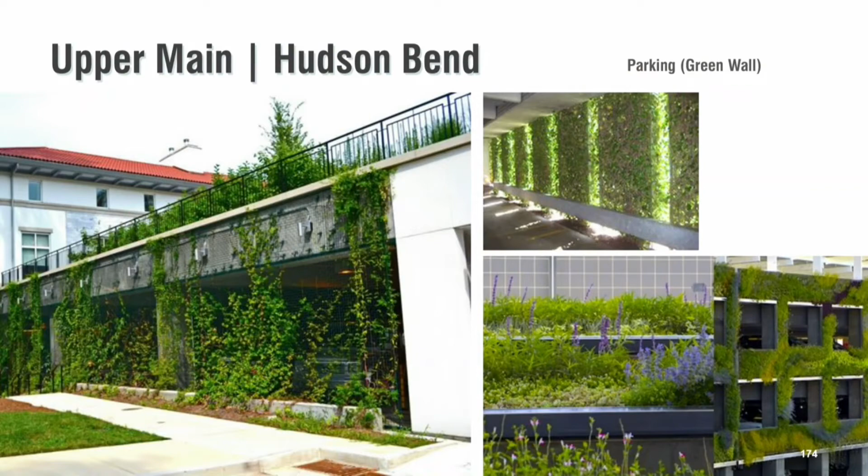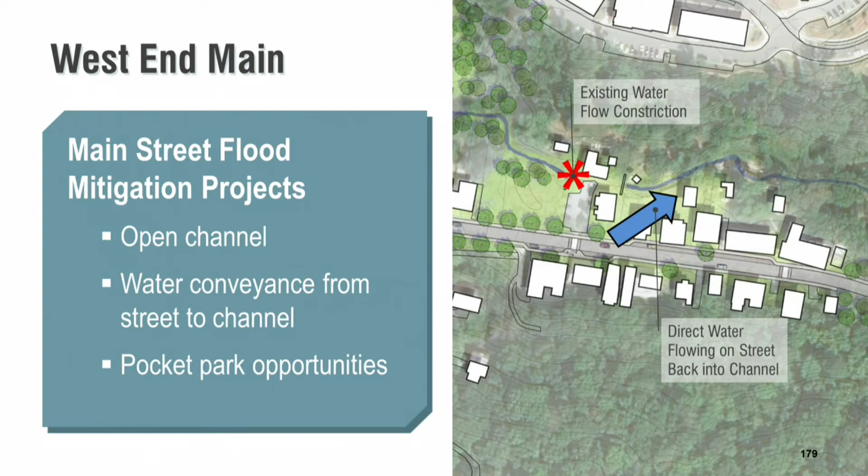As we move to West End, there are several projects underway. The culvert enlargement in the vicinity of West End Auto, dealing with some of the constriction points here. We'll be updating this graphic to include the details of that project as that's developed further. And then also further to the east on Main within the West End, looking at areas where we have constrictions and how we can get water from Main Street back into the channel. So these areas are being studied right now by the county.

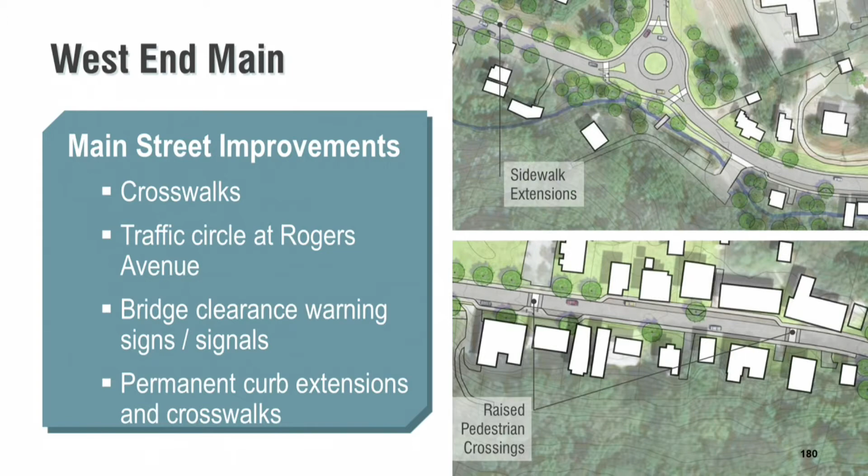We're also looking at street improvements for Main Street, crosswalks, traffic circle at Rogers Avenue. We talked about this back in March. Bump outs, and the crosswalks would be raised for traffic calming purposes, and then identifying where parking areas occur along West End. We have a lot of issues with speed along West End Main, so we want the traffic calming.

And I did start 15 minutes later, Chris. 11 minutes later? Okay. Did your 1 minute take that into account?

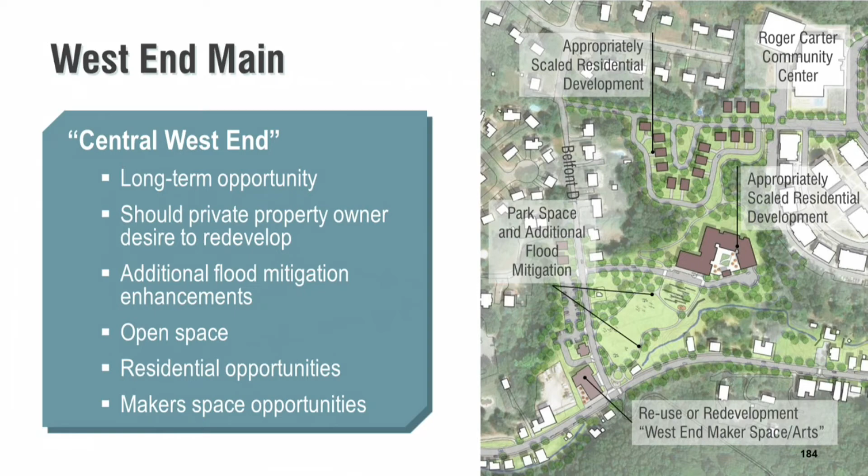Some of the plans right now as part of the flood mitigation are to improve and open up this channel that's currently underground. But long term, there's an opportunity for more park space and then more flood mitigation within this area, the lowest part of the site, and then move up the hill. And there's some opportunity for some infill to make the sale and reuse of this property economically viable.

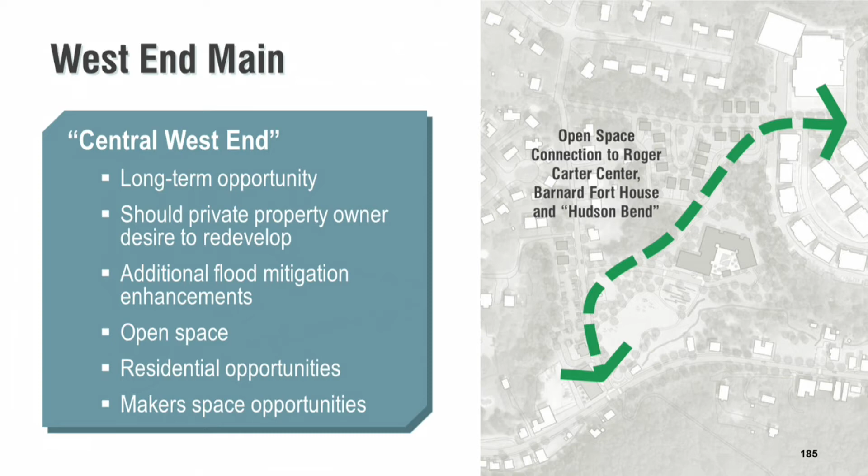And then also, incorporating any redevelopment of that site, it's important to look at the pedestrian network and how that ties into connections of the Roger Carter site and on into the Barnard Fort House, Hudson Bend, and other parts of Ellicott City. There's opportunities for some of the buildings that might remain to use maker spaces. There's a burgeoning art community and makers community in the West End. We see a real opportunity for that here and really distinguishing this district from the core of Ellicott City.

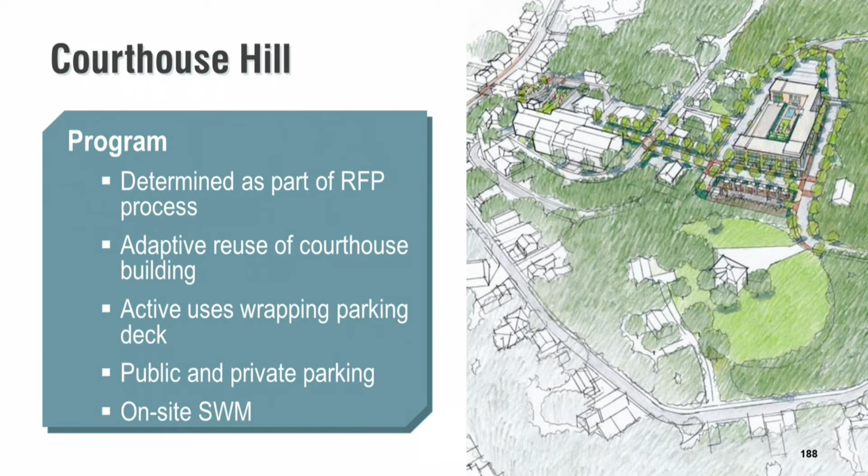It would be very important, while we're not going to dictate the design in the master plan, some things that are very important to identify. It should be an innovative design. It really has to be conscious of its interface and connectivity with the Patapsco Female Institute, Mount Ida, the connection to Main Street, have a clear site organization around a street network.

So this is Court Street, the historic courthouse is right here. There should be a real strong organized street network, possibly permeable paving or something, a surface parking area that could also service as an open space and keep views open to Mount Ida. If there's a parking structure, there's possibly even an upper level pedestrian bridge connection over into the hillside to the Patapsco Female Institute.

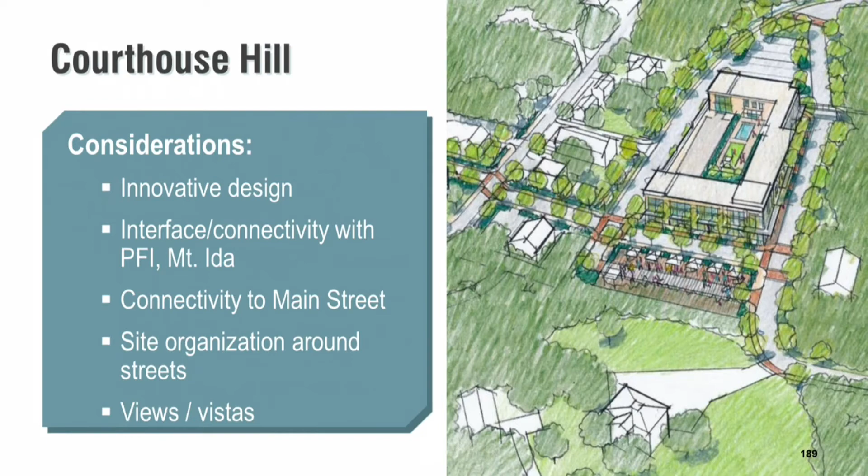The RFP will outline some very specific criteria that needs to be considered. As we look at the broader watershed, some of the recommendations we've been talking about include pedestrian connectivity along Frederick Road out to the library, along Old Columbia Pike, better pedestrian connectivity, and green infrastructure as part of the Office of Emergency Management's green infrastructure plan that every resident and property owner can get involved in and participate. We also talked earlier about the Tiber-Hudson Special Protection District that will look at stormwater requirements and how that's dealt with, and very importantly, debris management and channel maintenance plans.

So a long-term strategy involves some stream restoration, with conscious removal of trees. They might be healthy trees, but they could be in a very vulnerable location. So how do you strategically remove trees so they don't become debris? And then how do you replant that area with herbaceous material, smaller trees that still have a root mass, but are more appropriate for that floodplain in the valley.

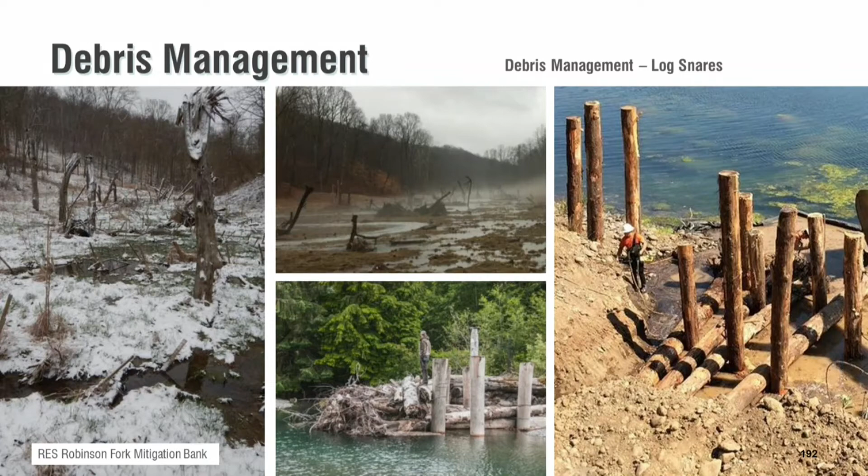Looking at creating log snares to help prevent debris from washing down. Further up in the watershed, these might be old tree trunks or logs that are inserted vertically into the ground to capture some of that debris.

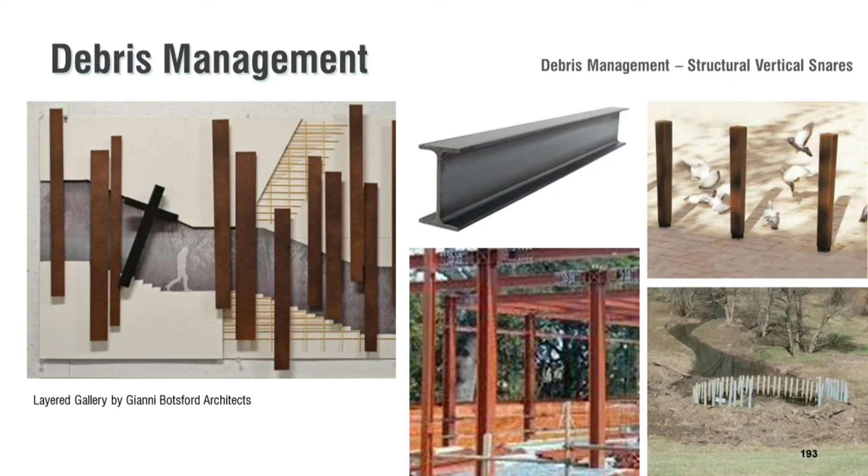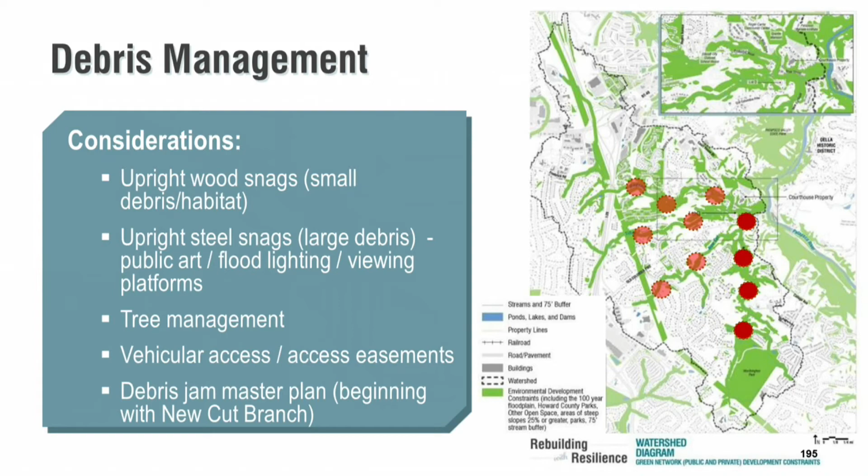If it's a particularly scenic tributary area, there might be opportunities to incorporate overlooks or pedestrian bridges across the stream along with those structures. These would happen throughout the watershed at various points along the new cut and other channels to keep debris from coming down into the channel.

As I said, the channels are only as effective as they can be maintained to function as they should. So, how did I do, Kristen?